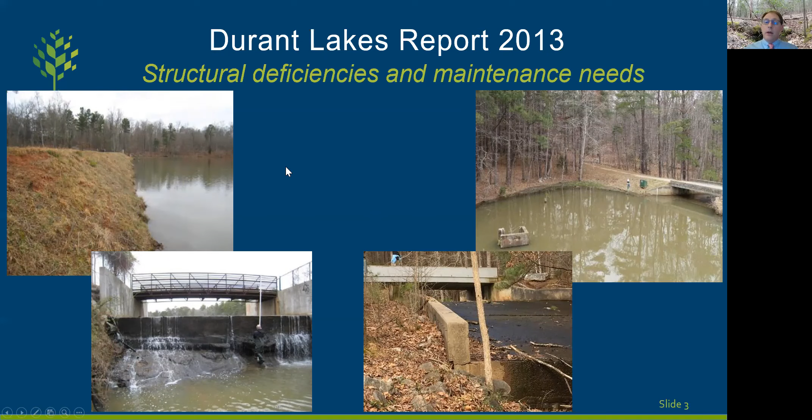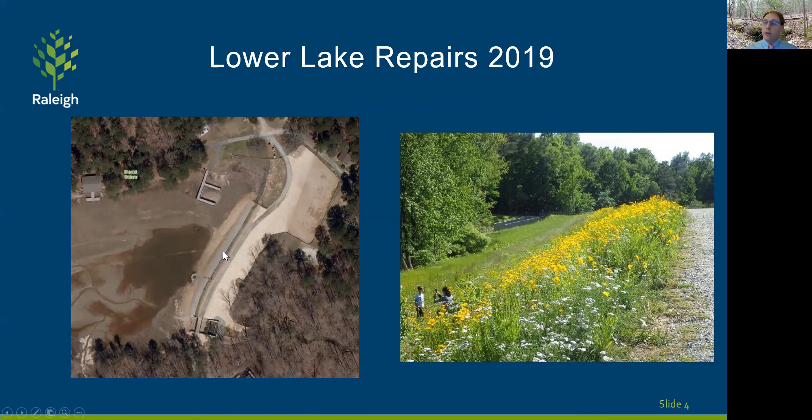And any of you that are regular users of Durant are aware that the lower lake needed to be drained in order for us to do that work. And on the lake side of the dam, we added articulated concrete block to reinforce it on the front, and then replanted the back of the dam after regrading it and fixing the spillway as well.

And one of the things that we did here is planted the back of the dam into native prairie species, native to North Carolina, and people are getting a lot of enjoyment out of that. And that's part in keeping with the designation of Durant as a nature preserve. So it's one of the things that we wanted to do, and it's in keeping with what we're trying to go through in terms of a process for the upper dam.

The other thing I mentioned here is we did a couple of things like the mesh that was used for erosion control on the back of the dam as the seed was germinating. We departed from the plastic mesh you would normally see at a lot of construction sites. This is a natural fiber product that does a much better job not trapping snakes and amphibians once you put it down. So that was one of the things that we did that worked fairly well.

And what I'd like to do at this point is just back up a second and talk about what is a nature preserve and where did that come from, and do we actually understand what that designation is that Durant carries. Durant's one of 4 properties that have a nature preserve designation across the city, and that came from a report that was done with a task force in 2011.

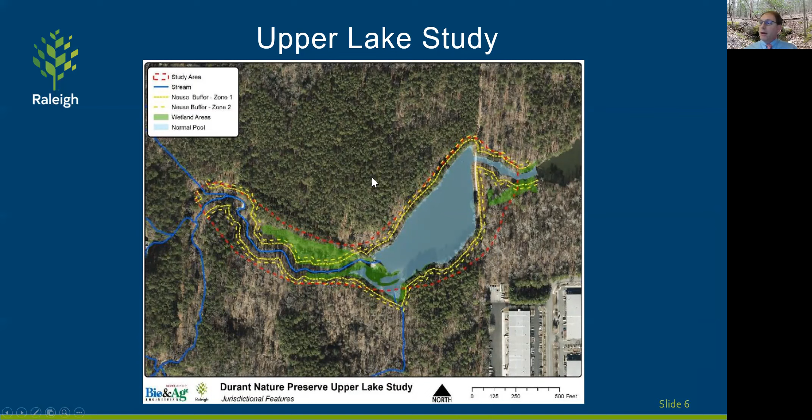So one of the things that any good scientist does is say, well, it'd be good to have more data and more information. And we started talking about it and realizing that we really need to understand what's possible in the upper lake. And that's exactly what this study did. I'm going to hand it to Kevin Boyer at this point to talk a little bit more about that. And then Dr. Doll will follow up and give you details out of the study. So Kevin, I'll hand it to you to talk about the role of Raleigh stormwater.

Thank you, Brian. Brian or Mike, would you verify you can hear me? Yeah. We got you. Okay, thank you.

Well, I'll be speaking briefly about the role of Raleigh Stormwater Management Division generally and in this project. But broadly speaking, stormwater management takes responsibility and charge for drainage on public rights of way and other public places within the city, also reducing pollution in our stormwater runoff and mitigating floods and flood damage where we can and have authority to do so.

Part of what we do, in addition to that, is to monitor the condition and function of city-owned and city-operated dams and spillways. And when needed, we repair and upgrade those dams and spillways. That includes evaluating their conditions and setting priorities for dams and spillways that do need work. When needed, we manage, design, get the permits, and manage the construction of repairs and upgrades.

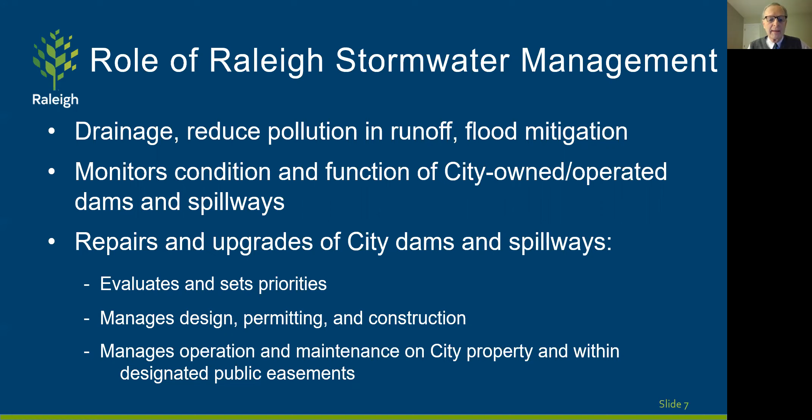And then once that's done, and for dams and lakes that do not need any work, we generally manage the operation and maintenance of the dams and spillways that are on city property and in designated public easements. Next slide, please.

Specific to the Upper Lake at Durant Nature Preserve, city stormwater applied for and managed a grant from the North Carolina Clean Water Management Trust Fund to study conditions and look at alternatives. We also provided city stormwater funds to augment the grant funds, and then we contracted with and coordinated the work of North Carolina State University to study the lake in conjunction with our preserve staff and other city departments.

You'll hear shortly from Dr. Barbara Doll about that. Next slide, please.

Also under the city stormwater's charge is what we're calling the city lake policy. It began in 1994 and then was called the Lake Preservation Policy. And at that time, the primary purpose of the policy was to work toward preserving Raleigh's existing lakes to the mutual benefit of the city, citizens, and the lake's owners. That is, the focus was on preservation at that time. There was not lots of activity under that policy.

And then in 2004, the city began a stormwater utility where we have a fee paid into the utility by property owners that then gave us a regular stream of revenue for which we could plan projects, including projects on lakes and dams and spillways. And the policy was updated in 2006, adding flexibility to the old policy by giving us the flexibility to consider lake location and drainage basin rather than a one-size-fits-all policy for the whole city. Next slide, please.

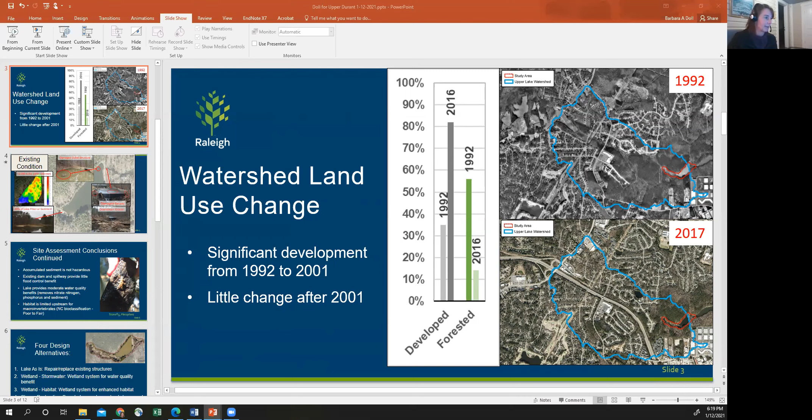So if we look at the existing condition of the lake, we have several things to consider. We've got a damaged outlet structure here. This was identified in the earlier study that Brian referred to. We have a damaged spillway. It has some problems. It has cracks in this concrete exposure.

It's very undermined at the bottom end of it. And there's a lot of erosion. So you can really see how exposed that spillway is at the bottom end.

We have a moderate amount of sediment that has accumulated in the lake over time. The survey we did estimated around 12,500 cubic yards, and that's resulted in a loss of about 20% of the storage capacity of the lake, with a lot of that sediment occurring at the upper end of the lake.

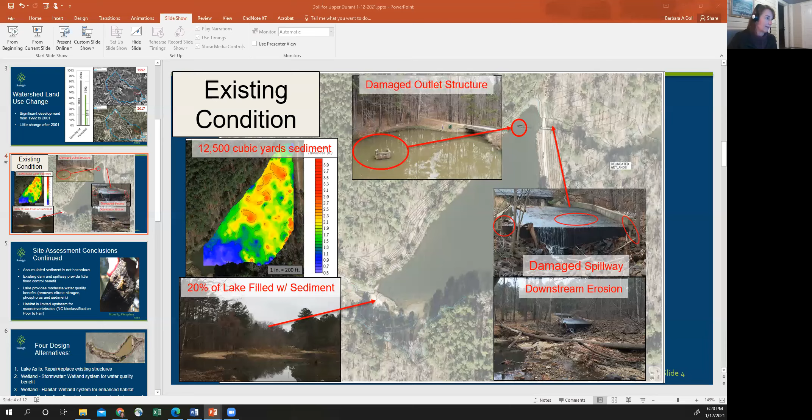So also looking at the other site assessment results, we found that the accumulated sediment was not hazardous. There were not any contaminants there that would be of concern for that material. The existing dam and the spillway really provide little flood control benefit. All of our modeling of the hydrology showed that.

They just really didn't shave off any of the high peak flows that can occur when we get very large storms. The lake does provide moderate water quality benefits. We did upstream, downstream sampling in the creek above and below, and found that it removes some nitrate nitrogen, some phosphorus, and some sediment.

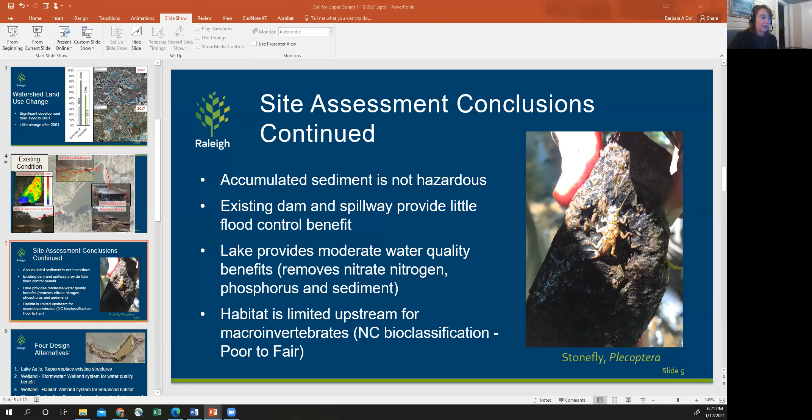And we found that the habitat above the lake in the stream was very limited, with a poor to fair bioclassification. Again, we looked at aquatic insects, and here's an example of that, a stonefly. These are invertebrates, insects that start their life in the water and then emerge from that. And they're good indicators of stream health.

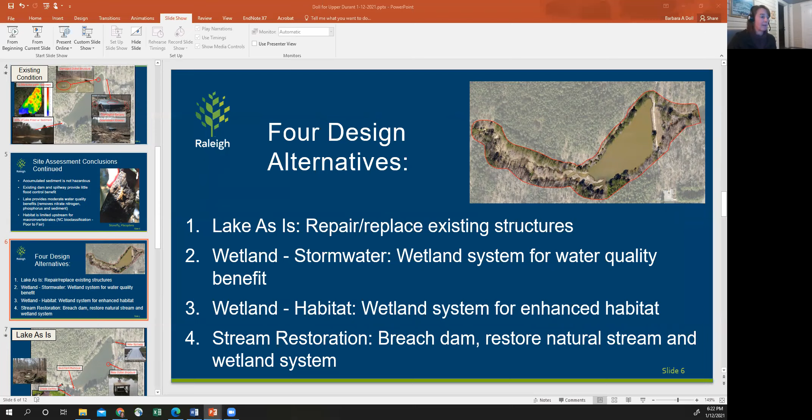So with that information, we then set out to look at the 4 design alternatives. The first alternative is to keep the lake as is, repair or replace the existing structure there. We looked at 2 wetland versions. They're fairly similar. There are some minor differences between those.

And then finally, the last option we looked at was a stream restoration, where we'd breach the dam, restore a channel there that would mimic a natural stream, with some wetland system in the floodplain combined. So I'm just going to quickly review the 4 examples and show you some of the highlights from that. The report we have is much more detailed.

For the lake as is, what that would include is to install a new spillway, because as I showed, that's very damaged and would actually have to have a new weir at the top of it. A new outlet structure here, out more towards the middle of the dam.

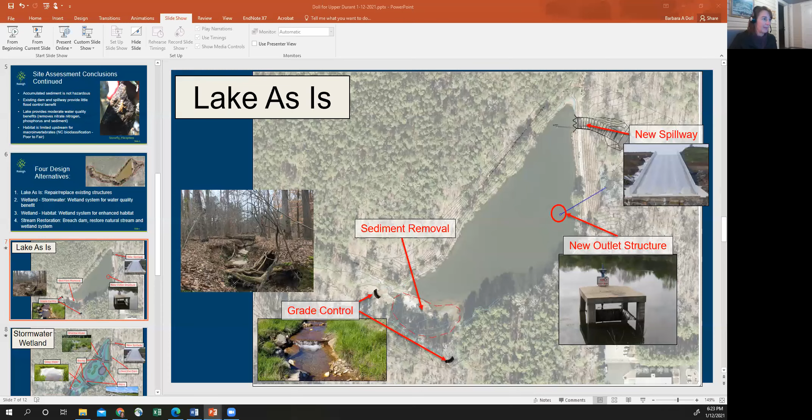And we would put in some grade control structures, because we have some eroding channels that are draining into the lake. And when you've got this type of erosion downward and widening, this causes a lot of sediment to get into the lake. So it'd be very important to prevent some of that further down erosion of these creeks, and prevent some of that sediment from getting in, and then also to remove a portion of that sediment at the upstream part of the lake.

So the first stormwater wetland design we have includes some shallow water areas where you would have lots of emergent plants that are going to help with water quality. They're going to also provide some habitat. And then we'd have some deep water zones that could have some fish in them, and also allow for some settling of sediment. It would be this wetland design.

We have quite a bit of slope. It's about a 1.5% slope across this valley. So we have to step that down. So this wetland approach had 3 berms with weirs to step it down about 2 foot on each step down to the bottom. So then the water flows through the weirs, and it's a labyrinth type weir like this on the bottom right that we recommended for that.

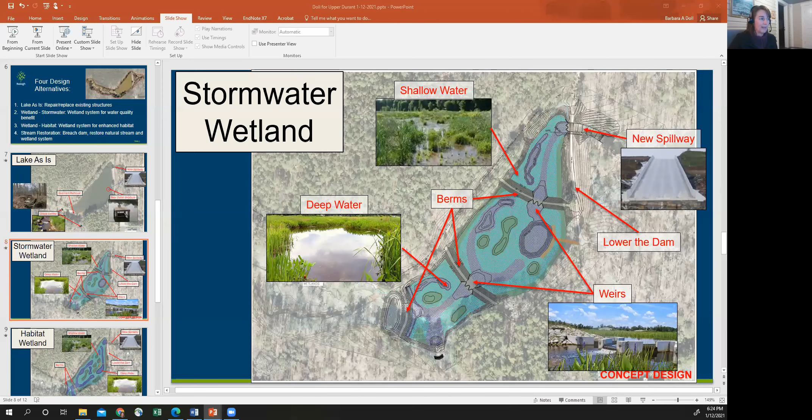We would also have to still replace that spillway outlet, and we showed lowering the dam a few feet in height with that, and that would alleviate some of the drop as well on the spillway to lower that down.

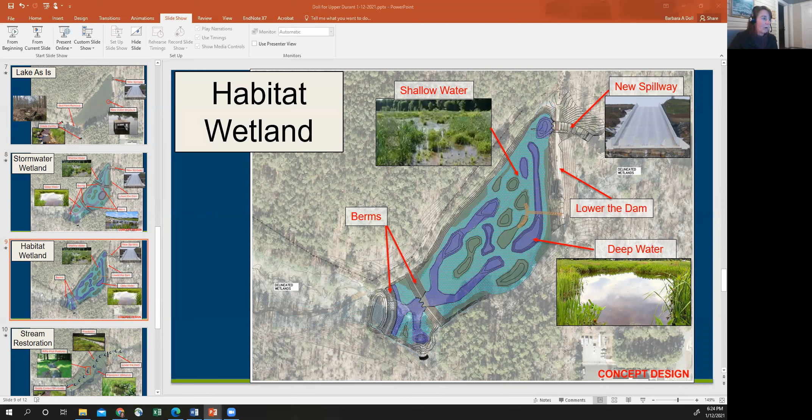The habitat wetland, as we called it, also has shallow water areas and deep water pools similar to the previous wetland example. However, with the berming, we looked at stepping it down much more at the earlier part of the wetland, so you could have a larger contiguous wetland area here. It would still require a new spillway and lowering the dam by a few feet.

The final alternative we looked at is stream restoration, where we'd convert that area back to a channel and floodplain, again, mimicking what we would see in the natural environment, maybe somewhat similar to what might have been there before this area was impounded by the dam. And so we would have this channel and a floodplain here, and we would build riffle pool features in the bottom of that channel for habitat.

And we would have to have a number of grade control structures because, as I said, it drops down in elevation about a 1.5% slope. So you would have a number of these structures created from large boulders that create a series of steps down the channel. You would have a wide floodplain that would get planted. Here's showing one with new vegetation, but you would want trees eventually to grow there.

And we showed incorporating floodplain wetlands out here, kind of pockets and pools that would provide habitat for amphibians. Because again, remember, some of the goal was to diversify the ecological habitat that's there. We would lower the dam much more than before to really reduce that whole big impoundment effect, because this would operate more as a stream and a floodplain.

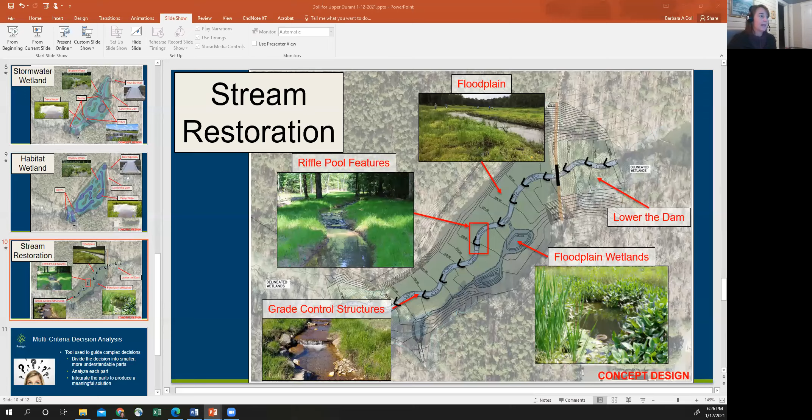All right, so to compare the different approaches, we use something called multi-criteria decision analysis. This is a tool that's used to guide complex decisions, and it helps you by dividing those decisions into understandable small parts. You analyze each part, and then you integrate those parts to look at what a meaningful solution might be.

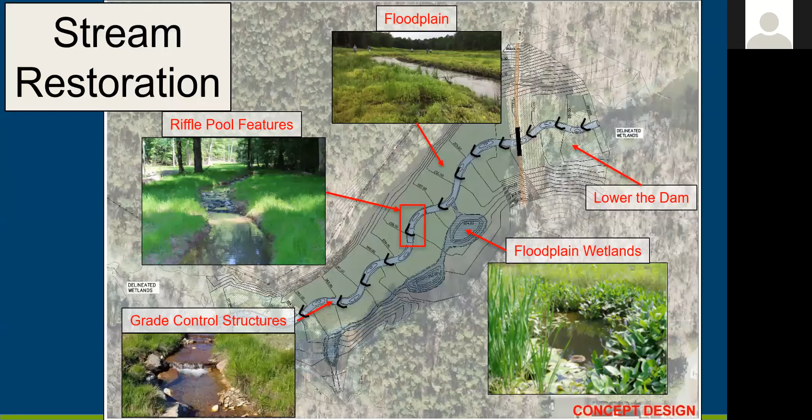You'll notice, I mean, it's been 20 plus years. It's mostly still a grassy sand area, with a stream wandering through it. Every time there's a heavy storm event, the stream reconfigures itself. No floodplain forest has regrown in that area. So it's kind of curious. I mean, I'm curious about that.

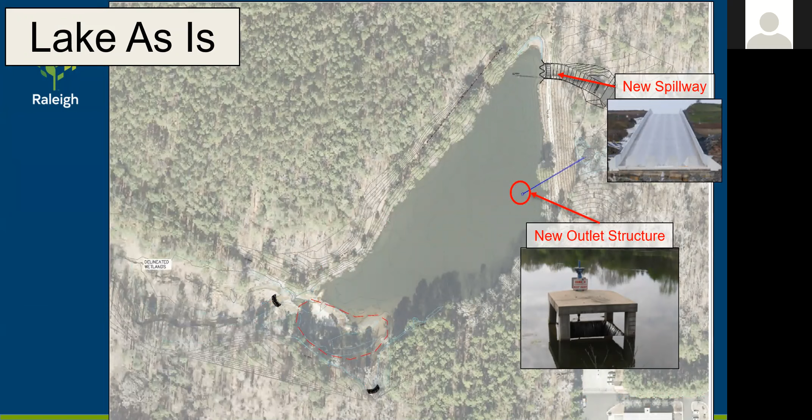But when I look at the plans you have, I don't know which of those plans is actually going to arrest that movement of sand and silt down. It's a huge amount of sand and silt there. And is that going to continue to come down with storm events and cover up whatever you put in?

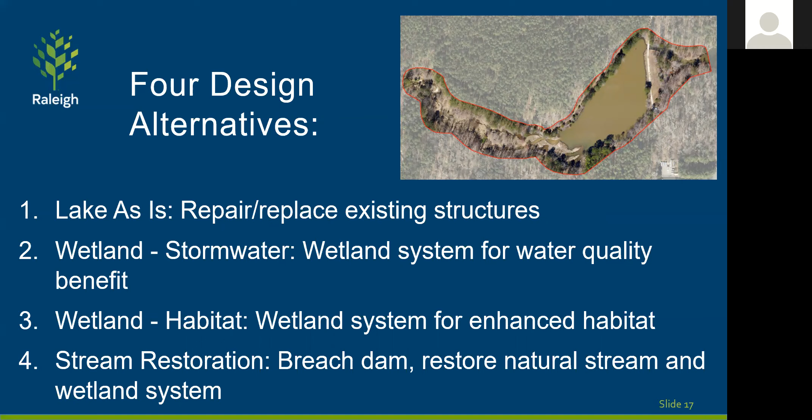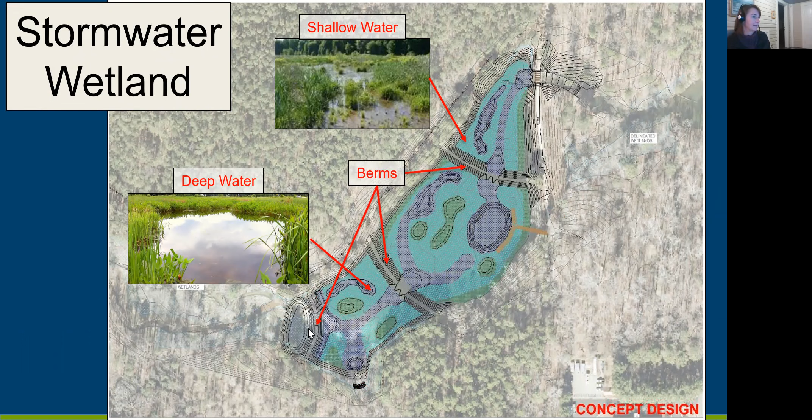If you advance the slide ahead to the lake as is, and actually go to the next one, Brian, to the first wetland. Yes, so at the top, we've got this forebay. Perfect, Brian. That forebay is going to help with capturing some of that sediment. It provides a clean out space.

And it's really sad to hear about the beavers because them impounding water above, they were really creating that forebay and creating an area for that material to drop out and maintain some of the storage capacity of the lake. But what you're describing, John, is very common. I've heard that in urban environments with the flashy urban hydrology, it can be really tough for beaver.

Now, one thing I have seen is that sometimes structures like these labyrinth weirs we've shown actually facilitate beavers. So maybe they come back in on the upper part of this and it provides a structural platform for them to build and they dam. And as long as elevations are such that it doesn't flood anybody upstream and that's tolerable, that may happen, because a lot of times their dam is really blown out by a really severe tropical storm.

We had that on our campus creek. We had some beaver and they were blown out during Hurricane Matthew. So without that structural human help for them, that would not be uncommon. But again, that forebay is intended to have that first pocket. So that's the multi-cell, you have more than one cell, stopping some of it at the upper end so it doesn't continue all the way down.

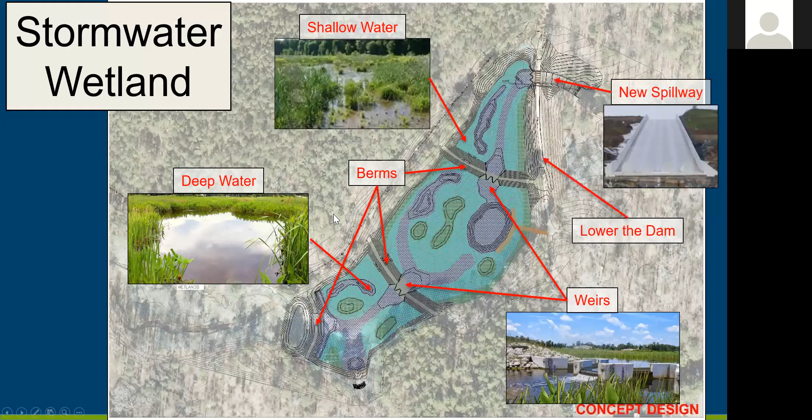So I don't know if you've looked at that. I'm not even sure this is a question, but maybe Kevin and Barbara could think about that. And yeah, I had that in the PowerPoint, the one slide of that tributary that's coming in.

John, this is Kevin, and you're aware that with development would come a requirement for stormwater controls, mostly applying to reduction of runoff of nutrients and reduction of peak runoff, such that it approximates the pre-development rate of runoff. But there's still impacts downstream. One thing I can speak to: we can't really address it until it's rezoned and about to be redeveloped.

But with rezoning would come rezoning conditions potentially, usually offered by the developer, but in some way or another part of the city's authorization for rezoning, that we could work with the developer to further reduce runoff and further reduce sedimentation from any new development. We're seeing a trend toward that being a condition of rezoning expected by the city.

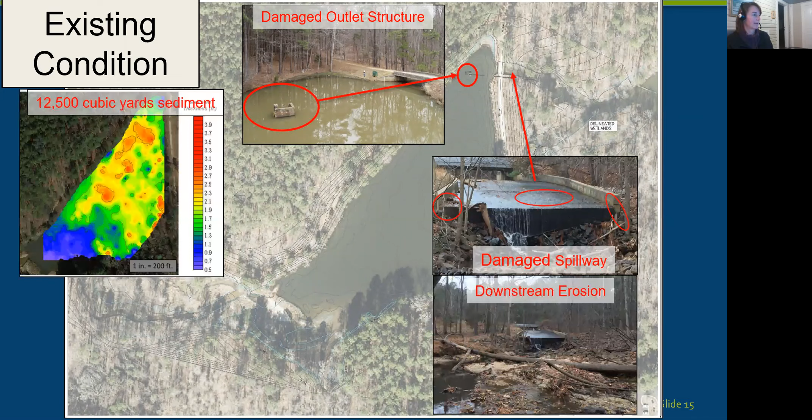Now, I think it's wise with all these impoundments to look at the whole stream network. And if there's really severe problems that may need to be coupled with investments in these lakes, that you go up and look at the network and make sure you've got the streams as stable as you can before big investments in that reservoir, right? To protect that investment. That was my point.

John, also on Lincoln Park North, we are working on that stream that comes to the lower lake, doing some restoration design work on that right now. We're also entering into a partnership with the owners of Lincoln Park North to upgrade an old stormwater control device that was installed many years ago, but the regulation of it was never made very clear in the early days of rezoning conditions of this type,